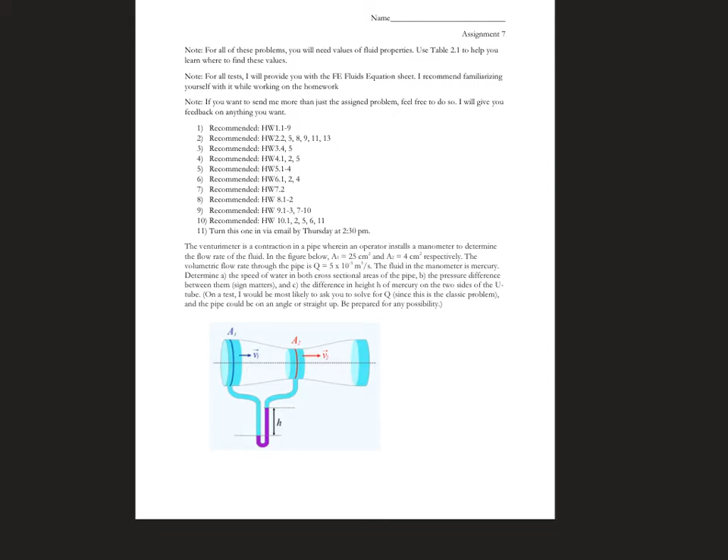Okay, hello. I'm just going to work assignment 7 here, or this particular problem, just in case you had any questions for how I did things and that sort of thing, because we don't get to do this in class.

Okay, so here's the Venturi. You've already read this, so you kind of already know what's going on. So I'm not going to read the problem to you, but you have time to read it. Okay, so the first thing this asks for in part A is the speed of the water in both cross-sectional areas. So we need the speed here, and we need the speed here. Also notice, a lot of times in a problem, they won't necessarily give us where they want these points, but remember, we're going to want our points to be at the center lines where the manometer comes in, because that's where we have the most information.

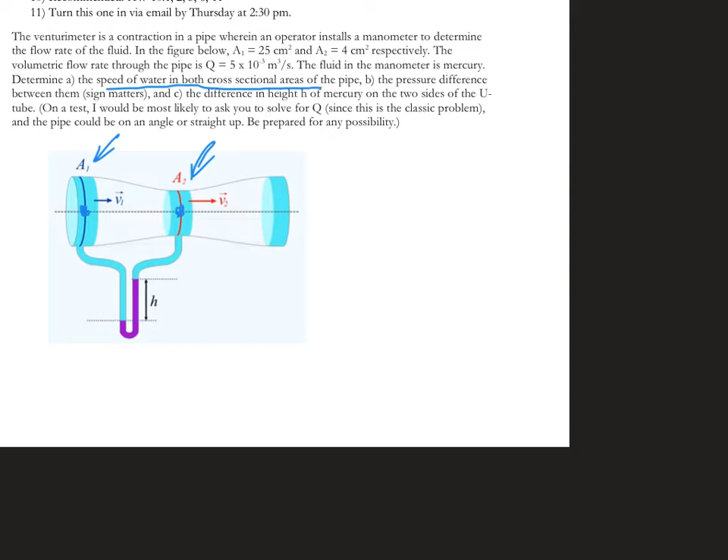Okay, so to get those velocities, V1 is Q over A1. So if we plug those numbers in, that's 5 times 10 to the minus... we're never going to fit this on here. Let's zoom in a little bit so that this doesn't look so huge. All right, so it doesn't take up so much space.

Okay, so Q equals V1A1. So we rearrange that to V1 equals Q over A1. If I plug in numbers, 5 times 10 to the negative 3, we're in CMS, cubic meters per second, and we'll divide that by the area at 1, and the area at 1 is 2.5 times 10 to the negative 3 square meters. So V1 equals 2 meters per second.

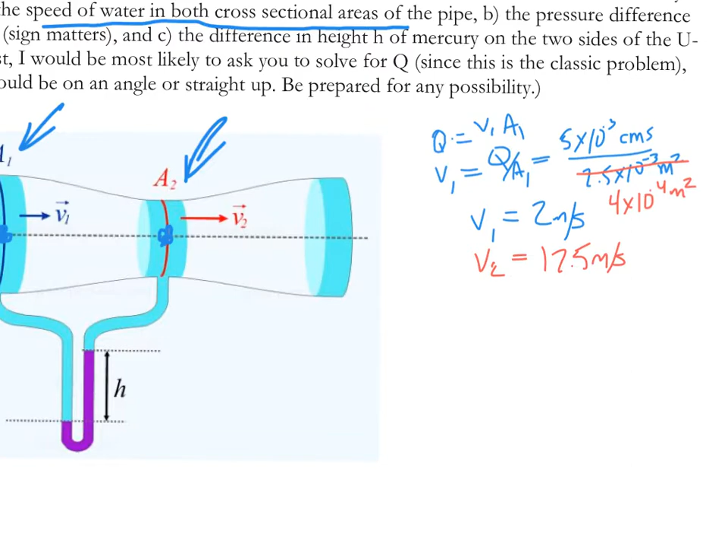And using the exact same logic for V2, but instead of this, we'll use the other area there, which is 4 times 10 to the minus 4 square meters. We'll get V2 equals 12.5 meters per second. All right, so that was part A. You guys did pretty well on that one, aside from a few typos or whatever.

Okay, so then the pressure difference. A lot of you guys got the wrong sign on this pressure difference. I don't really understand why that keeps happening, but let's get at it. There's really two ways to get a pressure difference between 1 and 2. One is we can do Bernoulli along the streamline, so we can do Bernoulli here. And the other possibility is we can do hydrostatics through the manometer. Problem with the manometer is this H is unknown, so we can't really do that. So we'll do Bernoulli from 1 to 2.

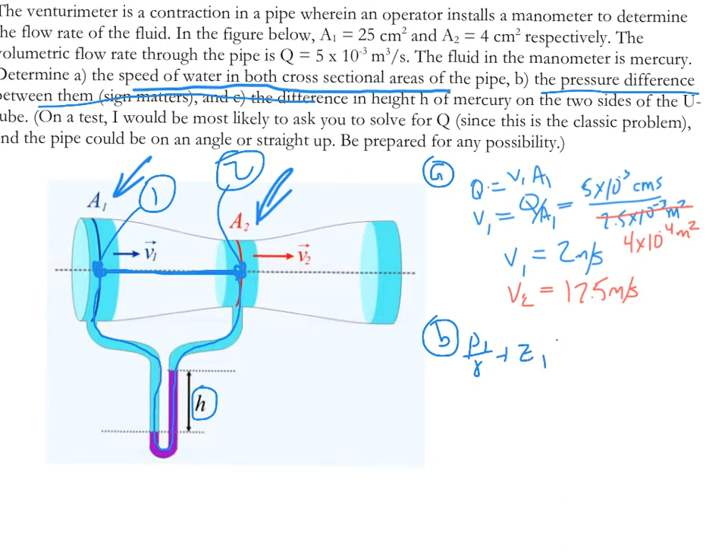Oh wait, let's make this A. So here's B. We're going to do Bernoulli. And so that's P1 over gamma plus Z1 plus V1 squared on 2G equals P2 on gamma plus Z2 plus V2 squared on 2G. The first thing we're going to do is make this our datum, because that way our z's go away because they're on the datum.

We have different velocities in both locations as we noted right here. So we can plug those in, and we've got P1 and P2. So we're going to solve for the difference. Now it doesn't matter if you get P1 minus P2 or P2 minus P1, but you have to label which one you got, right? So one way we can rearrange this is P1 minus P2 equals gamma times V2 squared minus V1 squared on 2G. That's just algebraic rearrangement.

So if we want, we can call this delta P. You could have also ended up with delta P equals P2 minus P1. That's the way I ended up with it on the key, which is already posted to Moodle. So then gamma here is, what system are we? Meters per second. So 9810 newtons per meter cubed.

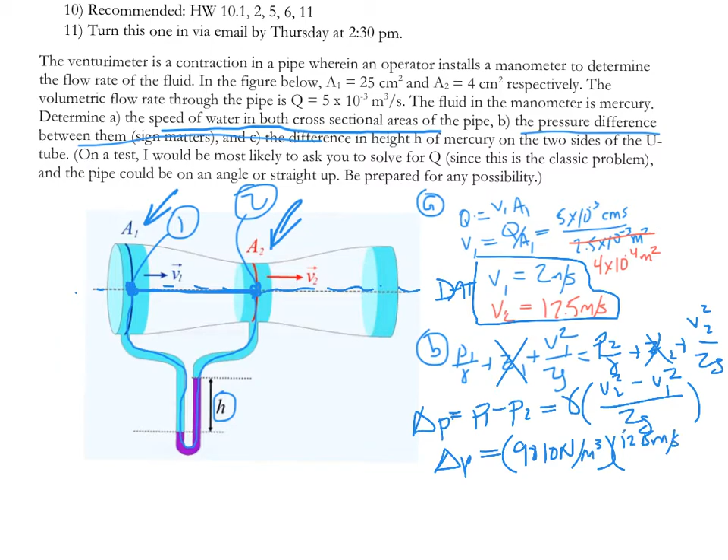Times V2 squared, so that's 12.5. So you can see this is going to end up being a positive number because V2 is larger than V1. Minus 2 meters per second squared, all over 2 times 9.81 meters per second squared. Checking units, this is going to give me meters squared on the top.

Wait, I'm really struggling with units right now. Meters squared, second squared on the top, so it's going to be meters on top. So what we'll end up with is newtons per meter squared. Okay, so delta P, if you plug all that in, you get 76,125 pascals or newtons per meter squared, depending on how you want to write it.

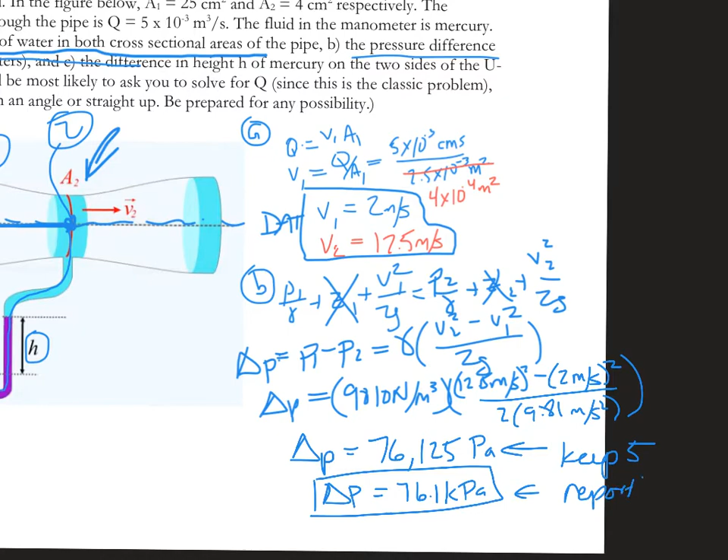Okay, and then for reporting purposes, give me 3 sig figs. Okay, so kPa. So this is the one you should box in, and this is the one you should work with. Okay, because this one we're going to keep 5 for work. Okay, report 3. And if you guys were ever wondering, I generally grade to 2. And if you do this rule, you'll always get it right to the 2.

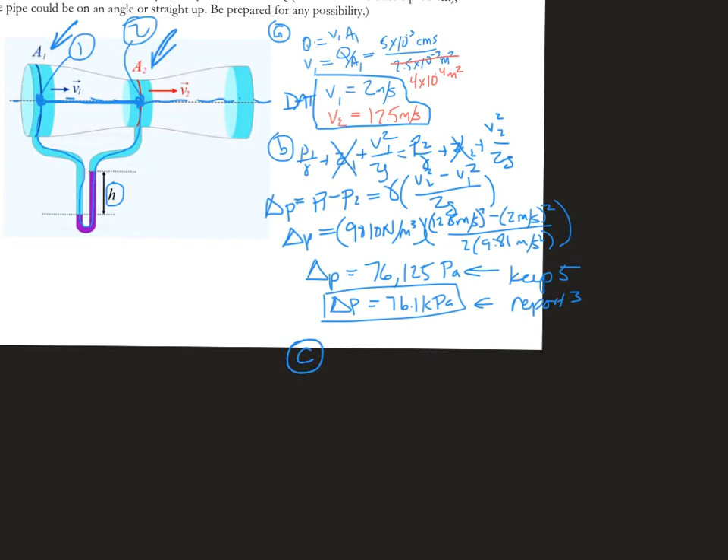Okay, here, number C. Now we want to know what this H is. So now we know delta P from here to here, and if we're looking for this H, we have to use a manometer. Now, there were a lot of errors here. A lot of people forgot to account for this water on this side. I don't know if you guys just looked up an equation for manometers, but we'll go ahead and do it.

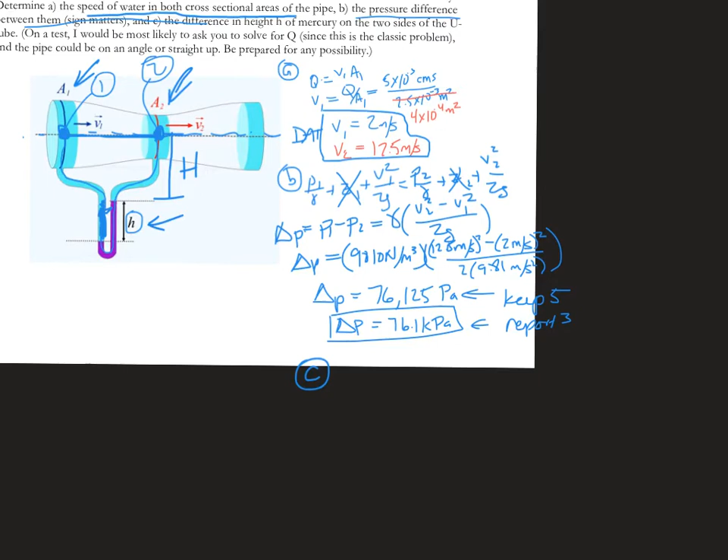So I'm going to call this distance right here capital H, and it should be obvious already for some of you that going down from 1 to here through water and then coming back up this side, those two are going to cancel each other. So calling this capital H is great, but it's just going to go away. We'll go ahead and do it.

So we'll go P1. Let me get a different color for this. Okay, P1, so over here. Now we're going to go down to here, plus gamma water. We'll just leave it as gamma for now. We'll put a little W on there. H. Okay, so that gets us right here. And we need to go from here to here. That's the part that everybody seemed to forget on their homework. Okay, so we'll go plus lowercase h.

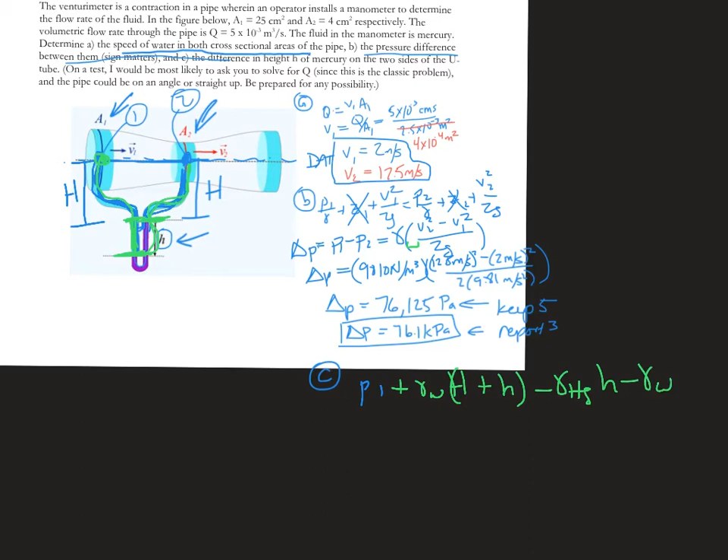Okay, so that gets us here. Now we're going to go over to the other side, and now we're going to jump back up. So we're going to go minus gamma Hg times lowercase h. Okay, that gets us there. And now we're going to go all the way up. Minus gamma water times capital H equals P2.

Okay? Here we got delta P, and that's P1 minus P2, so I know what that equals, right? But in order to get that, I'm going to have to bring this over to this side and bring all this stuff over to the other side, which is why I usually solve for P2 minus P1, or it's one of the reasons. But anyway, we can certainly do it. So P1 minus P2 equals, the gamma water capital H is going to cancel out. So I've got gamma Hg h minus gamma water lowercase h.

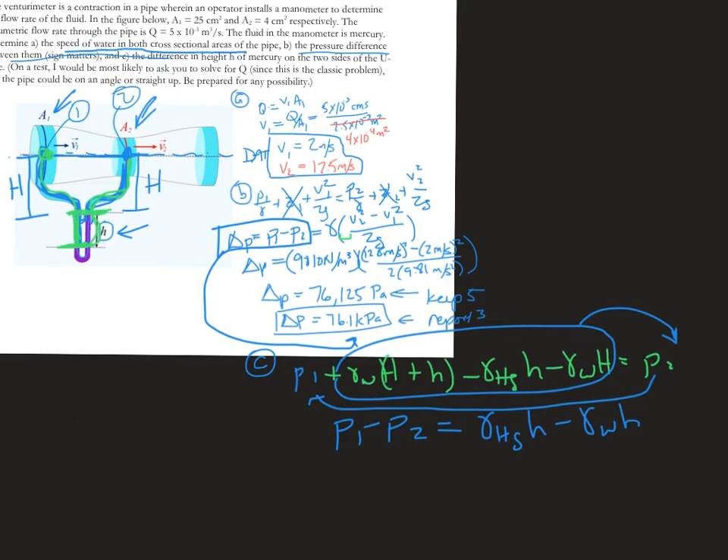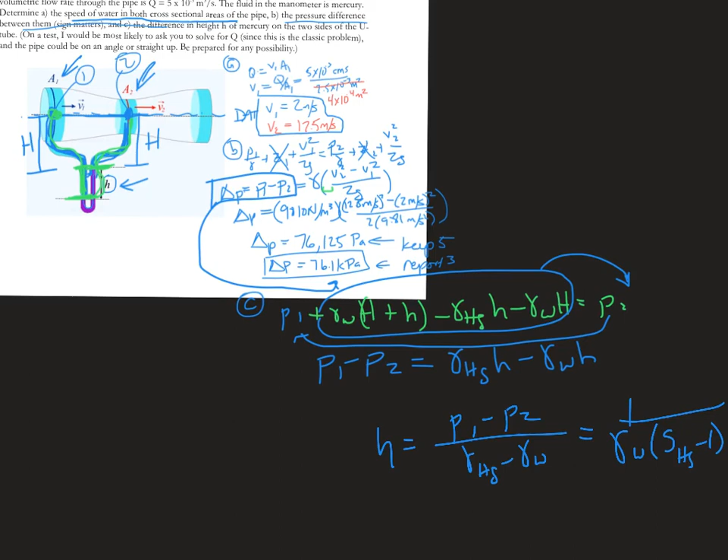Okay? And so we can solve this algebraically to be, if you rearrange terms, h equals P1 minus P2 on gamma Hg minus gamma water. Or some of you might even prefer P1 minus P2 over gamma water times SHg minus 1. Which is important because you could get a negative number here. That would imply the pressures were in the opposite direction, right?

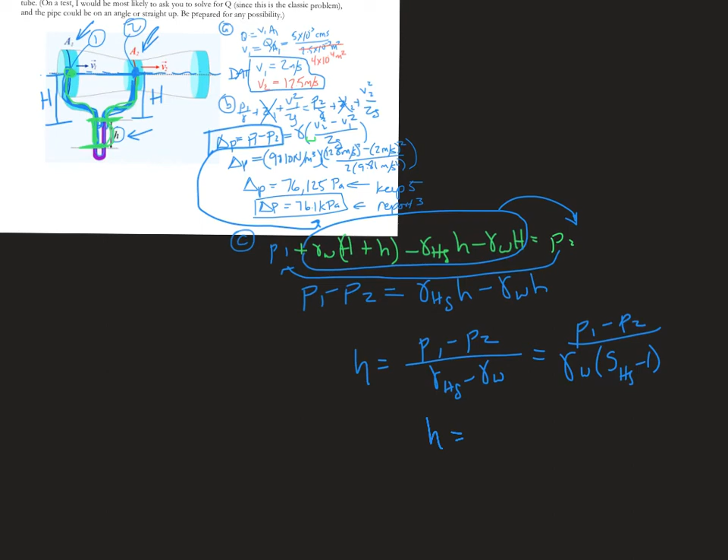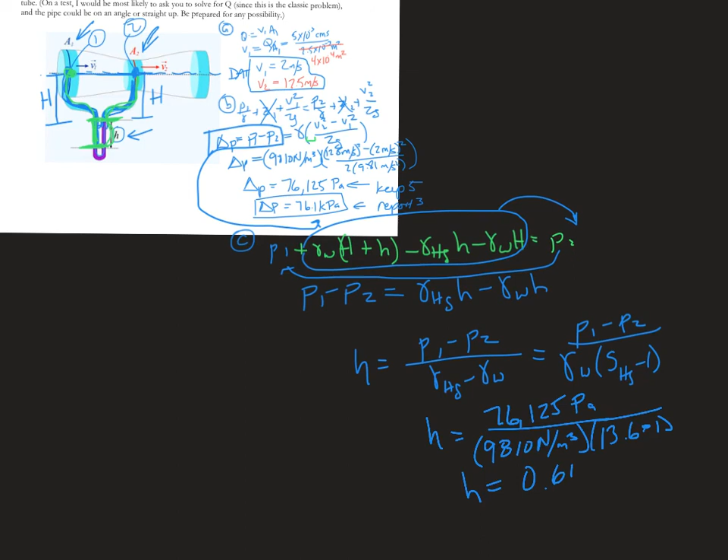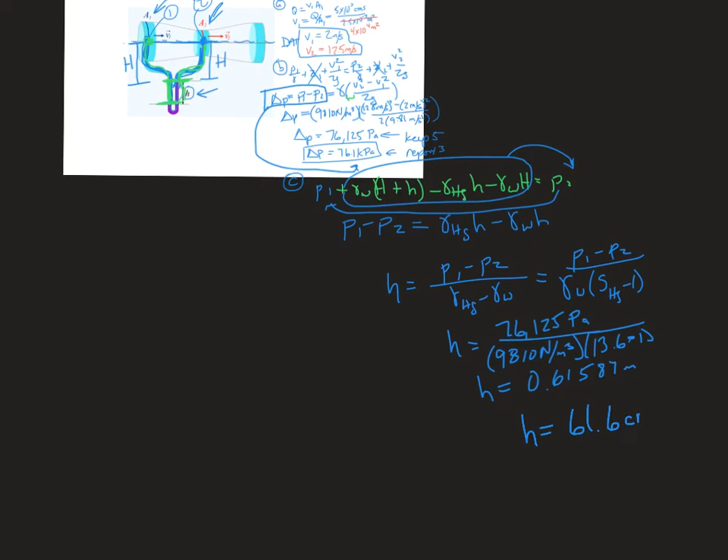So we'll go ahead and plug in 76,125 pascals, and we'll divide that by 9810 newtons per meter cubed, and 13.6 minus 1. So h equals whatever that comes to, which is 0.61587 meters. And then to report that, we'll say h equals 61.6 centimeters, or 0.616 meters.

All right, so I hope that was helpful. That's how you do this problem.